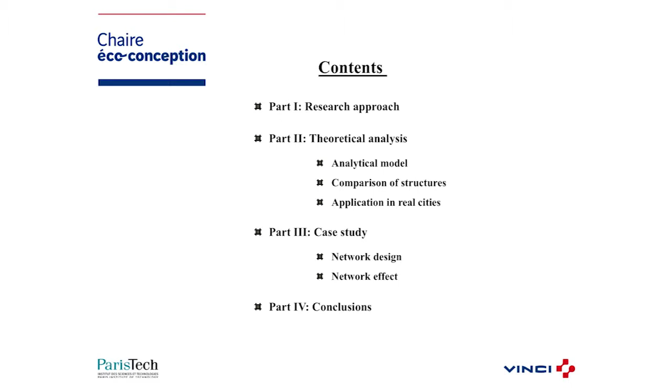First, I'm going to present the motivations of this research and the general question that I wanted to answer. Then I will explain the theoretical analysis in order to answer the previous question. In the third section of this presentation, I will show a specific case study where we try to check the previous conclusions, and finally, I will emphasize the most relevant results.

In the literature, we can find a discussion about how planners have to design the transit networks. In our cities, in general, planners try to design the networks reducing to the minimum expression the number of transfers. They consider that transfer is a very negative step of the transit chain, and then we have to connect most origin-destinations by direct trips.

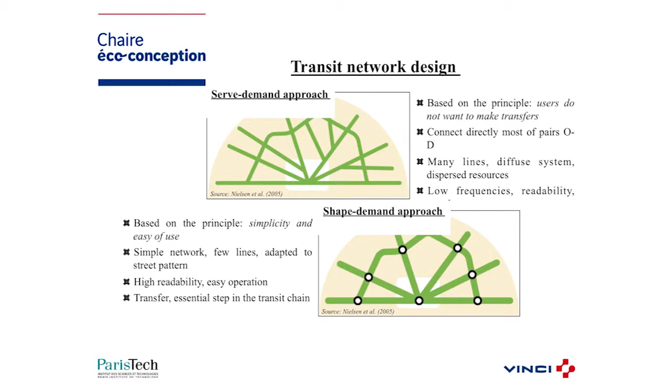It has certain consequences. For example, we need a lot of lines. The resultant networks are diffuse systems that don't work as a real network. Instead, they work as a group of lines, each one independent of the others. And with the evolution of cities, where cities tend to more dispersed scenarios, more complex mobility patterns, the necessity to connect more origins and destinations, then we will need more and more lines.

The result of these designs is that we have a lot of resources dispersed among many lines. Then we cannot reach high frequencies, and the readability of this network is too low, and users cannot take advantage of all the resources invested.

Then some authors propose a change in the design, working with simple structures, where with a small number of lines we try to cover all the city, where we focus all resources in a small number of lines, characterized by high frequencies and a high readability for users, but they have a problem. We will need to make transfers.

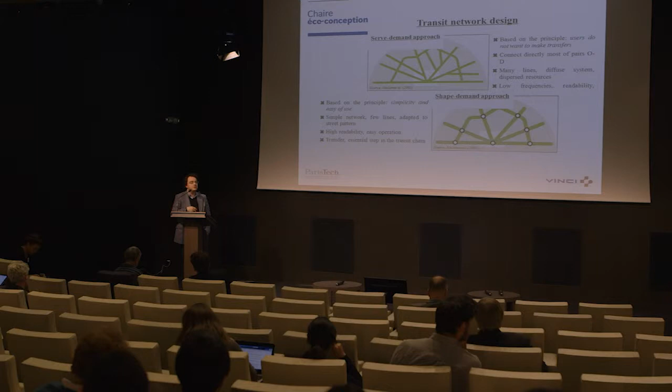And I try to compare these two design approaches to know if a change of the design from direct trips to transfer connections could be a good solution.

If we simplify the urban form evolution in this way, initially I have a city with a strong center where all activities are located, and progressively the city evolves to more dispersed scenarios where the activities are located in external areas of that center, initially in the surroundings of that center, and progressively in areas farther away from the center.

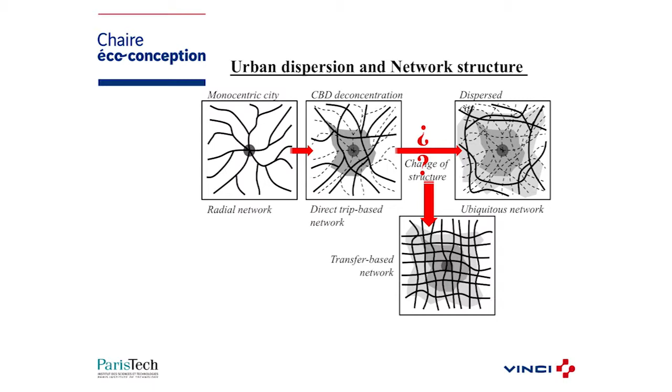The question is how we can satisfy the mobility patterns associated with the different stages of urban form evolution. Initially, a radial network could be a good solution because it's a cheap network from the agency point of view, and at the same time satisfies the centripetal vector of displacement. But what happens when new attraction areas appear in the city?

Then if we follow the first design approach based on direct trips, we will try to connect the new areas by additional lines that we implement over the pre-existing radial system, and progressively more and more lines. And the question is if there is a certain degree of dispersion from which the best solution is no longer the introduction of new lines, but rather to change the design approach, from direct connections to transfer trips.

And I tried to answer this question initially by a theoretical analysis. I worked with an analytical model based on continuous approximations and geometrical probability. It's a useful type of model to obtain general insights about the behavior of transport systems. I idealized my city as a square city characterized by a grid street pattern, only vertical and horizontal streets. And I assume a spatial demand distribution to represent the previous simplification of the urban form evolution.

Then my model optimized the different structures, minimizing the total cost of the system, where I consider agency cost, the infrastructure length, the vehicle kilometers traveled, and the fleet, and the different components of the user transit chains: access, waiting, in-vehicle, and transferring times.

Subject to different constraints, physical constraints, or the most relevant, the constraint of the occupancy with regard to the capacity of the vehicles. For each structure, I obtain the optimal configuration, and then the structure that has the cheapest cost is the most convenient to satisfy the mobility in a specific city with a specific dispersion degree.

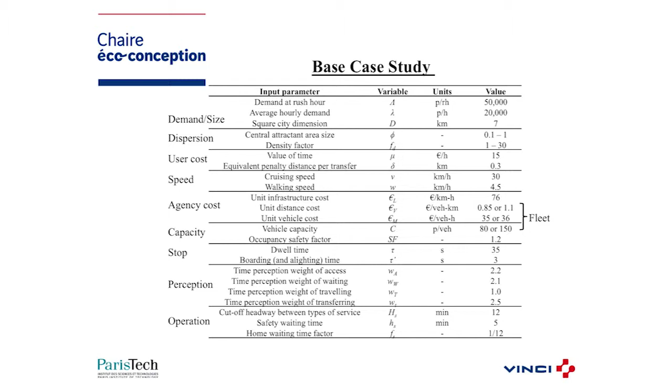Then after the model, I obtained different results. I worked with an idealized city where I defined the input parameters, demand, different parameters of operation like the speed, the capacity of vehicles, the dwell time. And first I get results from a scenario where I only worked with the parameter phi between 0, or close to 0, and 1, while the parameter FD remains equal to 1. I only consider initially the size of the central attraction area.

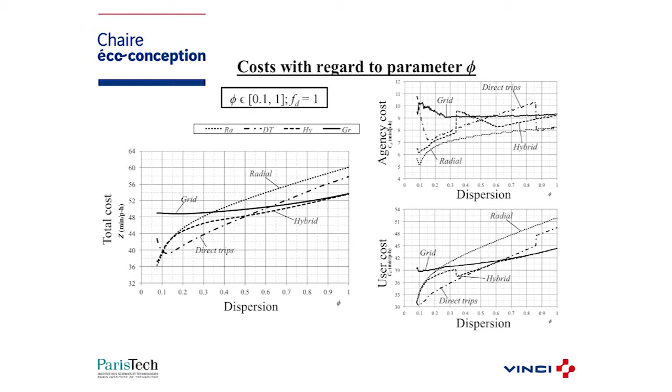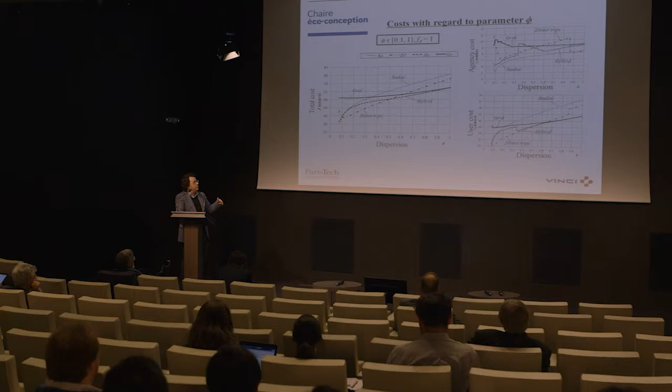And I observed that the total cost of the system for all the structures grows with the dispersion, but not in the same way. A radial network could be a good solution for a high centralization when phi is close to 0, but immediately the cost grows a lot with the dispersion. Direct trips could be a solution for intermediate scenarios of dispersion, but the slope of the total cost curve with the dispersion is greater than the transfer trips options.

Then there is a certain degree of dispersion from which the best alternative, or the cheapest alternative, would be to work by transfer trips. And this happened for total costs, but also if we compare a transfer-based structure with direct trips, for the agency it would be cheaper and also for users. Okay? The introduction of transfers gets a better balance between the different components of the transit chains to reduce the total travel time.

Here I show the different components of the travel time with regard to the dispersion for different structures. In a radial network, the number of transfers grows sharply for the first scenarios of dispersion, but the main inconvenience with regard to the rest of the structures is the length of trips, because all the trips pivot on the central point of the city.

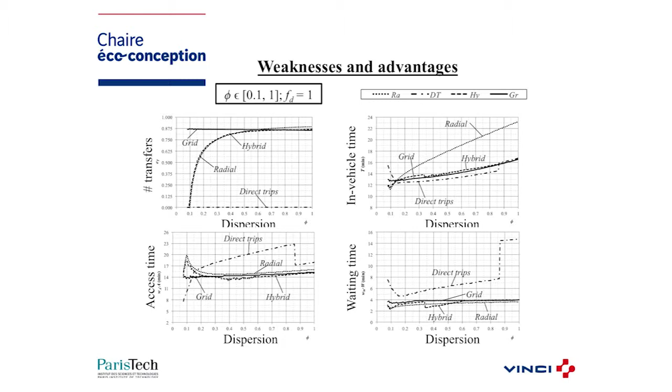In direct trips, the number of transfers remains equal to 0, but the users lose spatial coverage, or the frequencies are lower than, for example, in a transfer-based structure, where the percentage of transfers is high, but they get a better balance with regard to the rest of costs.

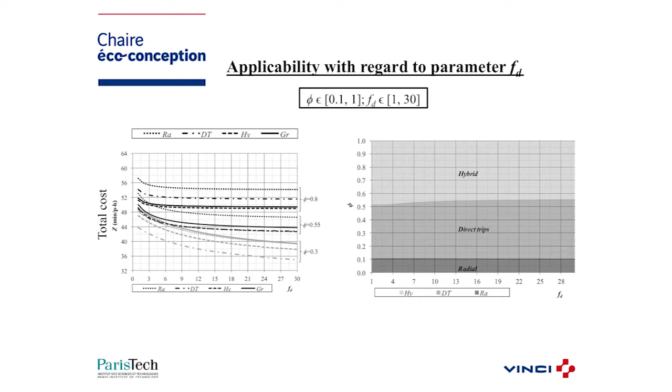Then I introduced in the analysis the parameter FD, and obviously the total cost for the different structures decreases because I have more central trips and the periphery has less presence in the mobility, but the decrease is similar in all the structures. Then if we obtain a diagram of application for the different network structures with regard to parameters phi and FD, we observe that the value of phi of change between structures doesn't change significantly, although FD is higher.

And with this analytical model, I can get a first approximation of the applicability for the different structures, that diagram of area of application, and it could be a tool to get a first approximation for how planners have to face the design of the bus networks. And then I wanted to translate these results to a real case.

First, in my model, I assume a monocentric structure with certain spatial autocorrelation, and my city works as a whole city. People want to go from any region to any destination, and the center of gravity of the mobility is coincident for the different districts of the city or different zones of transport. I don't have a city that works as independent districts.

And the second question is how to measure the dispersion in the city. The urban sprawl process has different dimensions, but I calculate two of them, concentration and centralization, because they are the most extended in the literature. For concentration, I use a Gini coefficient, and for centralization, an area-based centralization index, and I connect these real measures in the city with the parameters of my model.

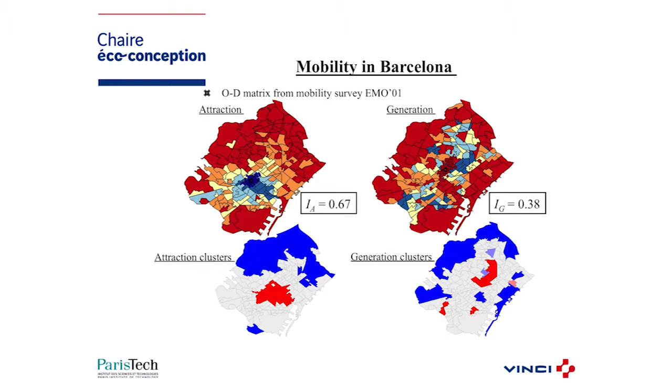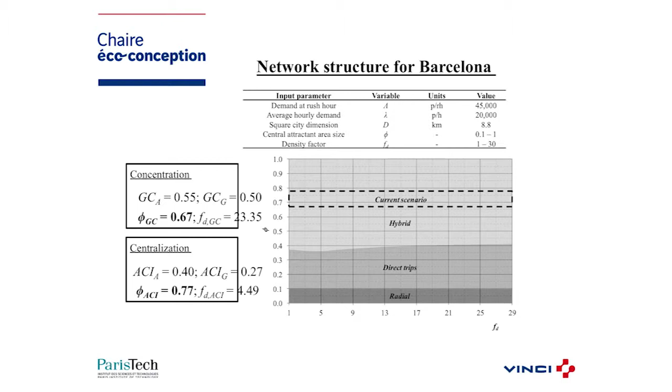Then I estimate the values for the Gini coefficient and the centralization index, and then the values of phi. And I determine the diagram of applicability for the different structures for this city, knowing the characteristics of Barcelona. And we observe that the values of phi in this city are in the area of application of a transfer-based structure, a hybrid structure.

Then now we try to redesign the bus network for Barcelona, thinking with a transfer structure. This is the previous network in Barcelona. It's a complex network with a high number of lines, only urban lines 63, then we have to add neighborhood lines and some interurban lines.

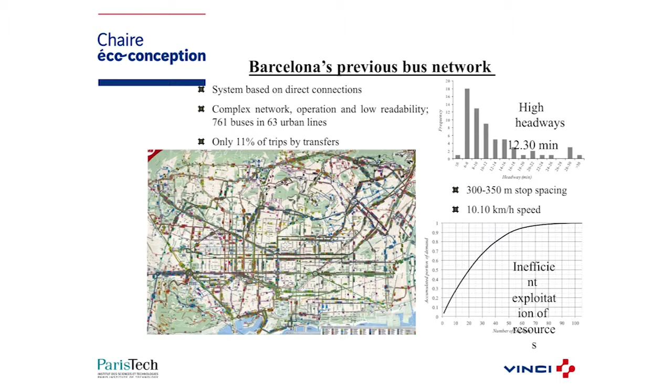This is a typical direct trips based structure where we have many lines and we have many resources, but there are many lines with very high headways, and only 20% of lines carry 50% of demand. We have many lines that are not used too much by the users. And only 11% of trips are transfer trips.

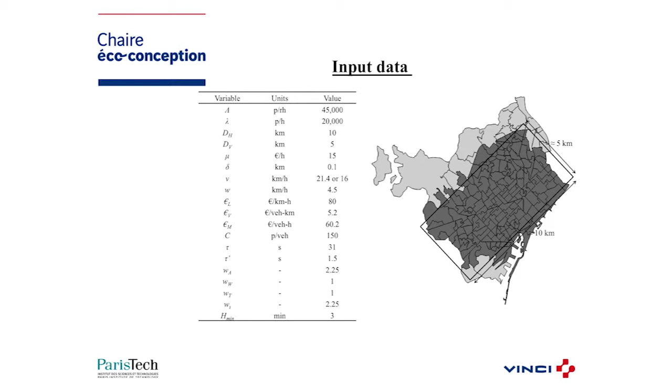We assume that this is an optimized enough direct trip-based structure, and we try to compare this network with a new network designed thinking in transfers with a simple structure. We use the previous model to design a bus network for the core of Barcelona, for the city of Barcelona, because the municipality of Barcelona is a small city, 50 square kilometers. And we obtain results in two different scenarios.

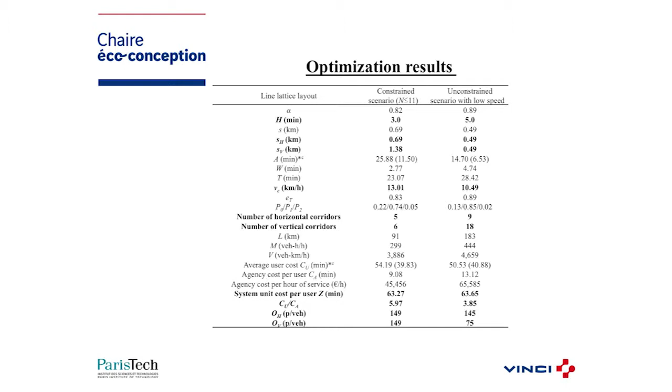The commercial speed in the bus of Barcelona is too low, only 10 kilometers per hour. And in one scenario, we try to improve the commercial speed. Then we need to implement operational measures, and the council said, okay, but we have to introduce a constraint on the design, only 11 corridors. We cannot develop this new network in more than 11 corridors of the city, because if not, the effects to the private vehicle would be too negative.

And another case is when we don't consider the possibility to increase the commercial speed, and then we don't have a constraint in the extension of the new network. This was the network for 11 corridors. We had only 220 kilometers, and it's a short infrastructure length where we can implement operational measures.

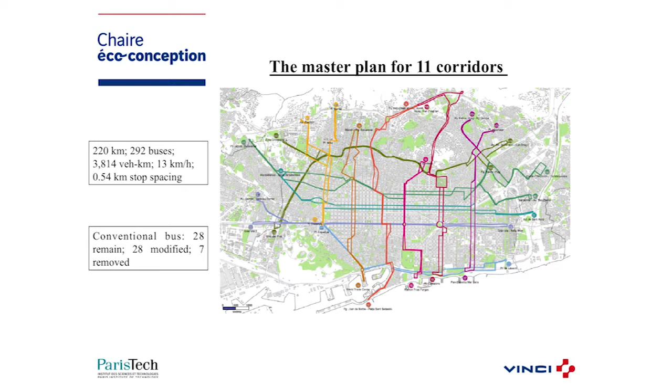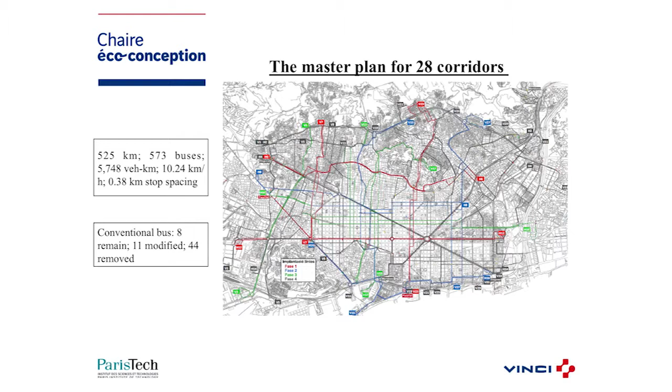But the problem of this network was that many areas of the city were far away from the new lines. Then we had to maintain a high number of the old bus lines working together with this new network. And the other option was a complete grid that has a better spatial coverage, 28 corridors. Obviously, the infrastructure length is longer, and the commercial speed is lower. But we can remove most of the old bus system.

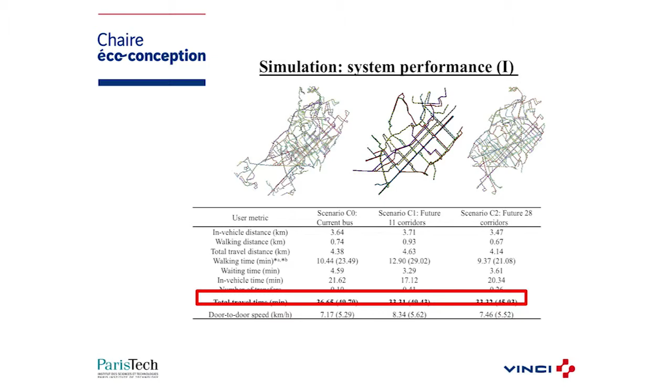We did different simulations, considering initially only the bus demand, and we assigned the demand in these scenarios: the pre-existing scenario, a scenario with 11 corridors and some of the old lines, and a scenario of 28 corridors. And we observed that the total travel time decreased around 9% in both cases, but in this case especially the in-vehicle time decreased due to the higher commercial speed, although the users have to walk a longer distance to access the public transport system.

In this case, the access cost is shorter, but we cannot reduce the in-vehicle travel time a lot. And we did the same simulation considering the metro system and the demand of the metro system, then the total demand of public transport, and we observed that we also improve the total travel time.

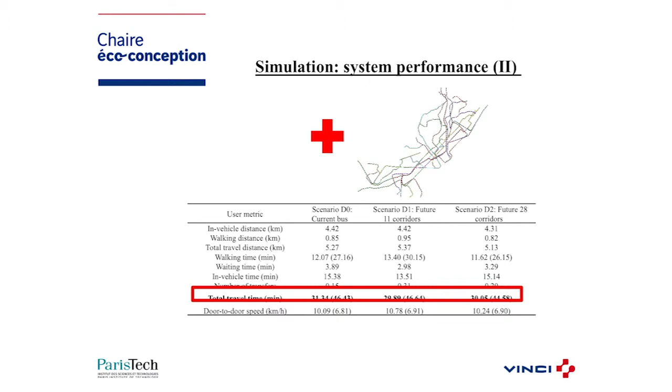Then the second option, the 28 corridors, was the network chosen for implementation in Barcelona. This is a slow process because the agency didn't want to implement the new network in one day. Then they started a progressive process that has not finished yet.

But two years ago, we had around 13 lines, and then we tried to analyze the network effect in this new network, because one of the most important factors for this type of network is if there is interaction between lines, if there are transfer trips between the different lines of the new network. Then in 2016, the new network was this. We observe a clear map where we can observe the transfer points.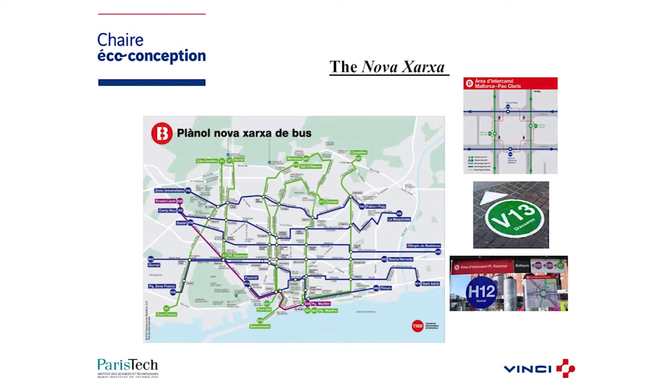The agency made a huge effort to explain well how people had to make transfers in the new system, with maps at the stop that indicate the way from one stop to the other stop, the information on which lines you can make transfers with, or even information on the street to follow the path between stops.

We had 3 different phases of implementation: 5 lines in the first year, 5 lines in the second year, and 3 lines in the third year. And in general, the implementation of one line implied that one old line was removed. Then we had at the same time working a network based on direct connections and a network based on transfers.

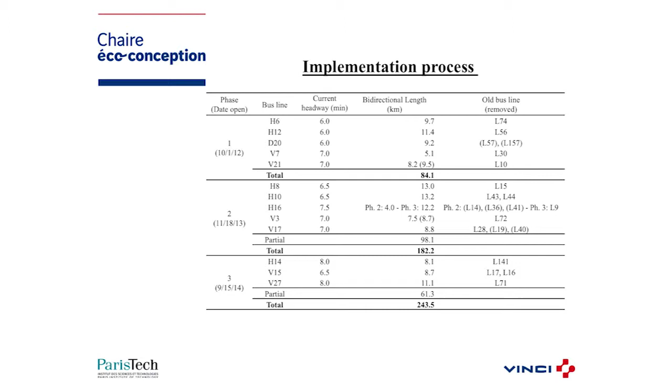And we wanted to analyze the evolution of the demand of the new networks. We had the number of validations for the different new lines per month, and we observed that the total number of validations grew with the implementation of more lines. But also, if we observe the total number of validations only from the lines of phase 1, we observed that this number grew in the second phase and also in the third phase, and we wanted to obtain a relationship between this growth in the number of validations with regard to the implementation of new lines.

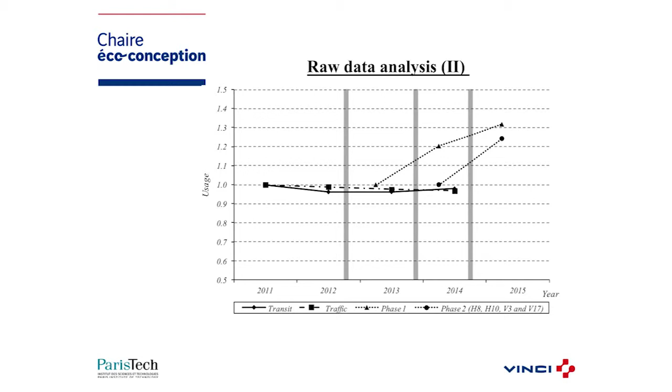Because this growth happened in the phase 1 lines and in the phase 2 lines, while in the remaining modes of transport the demand was practically constant.

Then we did a very simple regression model where we tried to relate the number of validations with regard to the direct trips that depend on the length of the line that we are analyzing, and one-transfer trips that depend on the length of this line, but also on the length of the lines that have a common interchange point. In this way, we can distinguish the number of validations that come from direct trips and the number of validations that come from transfer trips.

As users validate in the first vehicle and in the second vehicle, we remove half of the validations of one-transfer trips to obtain the demand of the new lines. And we observe that the percentage of transfer trips in 4 of the phase 1 lines reached in the third phase 26% of the total trips. That is higher than in the old system, that was only 11%, and the prognosis in the last phase would be 44%, almost the metro system.

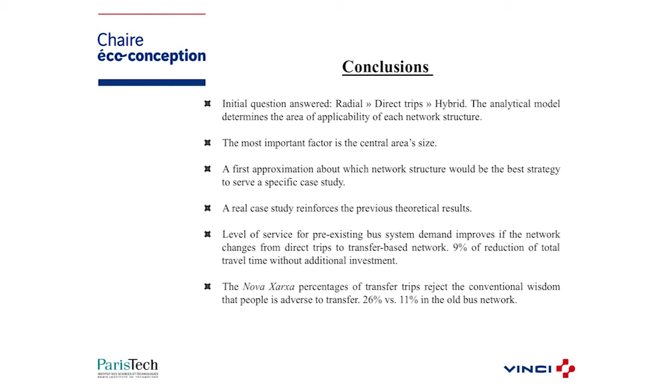Then the first question, whether there is a certain degree of dispersion from which the best solution is to work with transfer trips, was answered by the analytical model, and this could be a good tool for a first approximation about what kind of design approach planners have to follow in a specific city. And then the application in Barcelona shows by simulations a reduction of 9% of total travel time with this new design, and the new network is reaching 26% of transfer trips in comparison with the 11% of the old system.